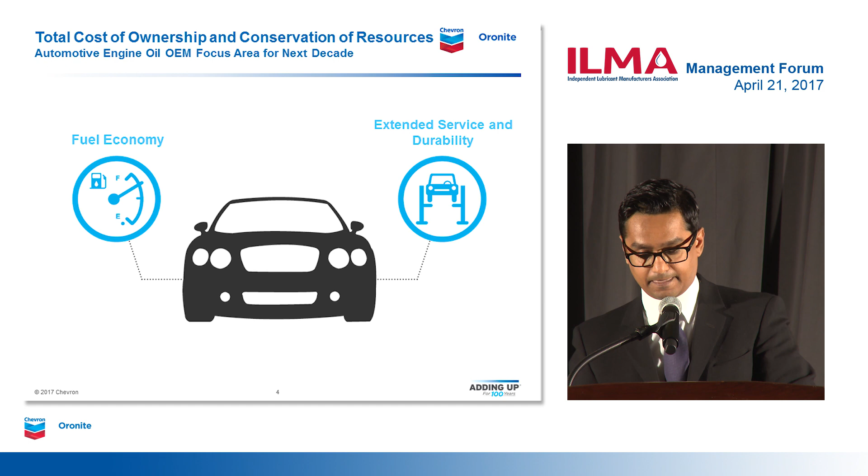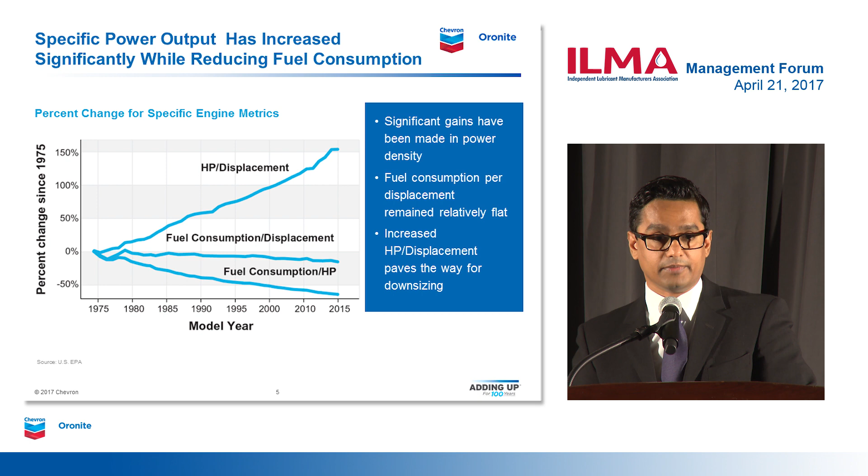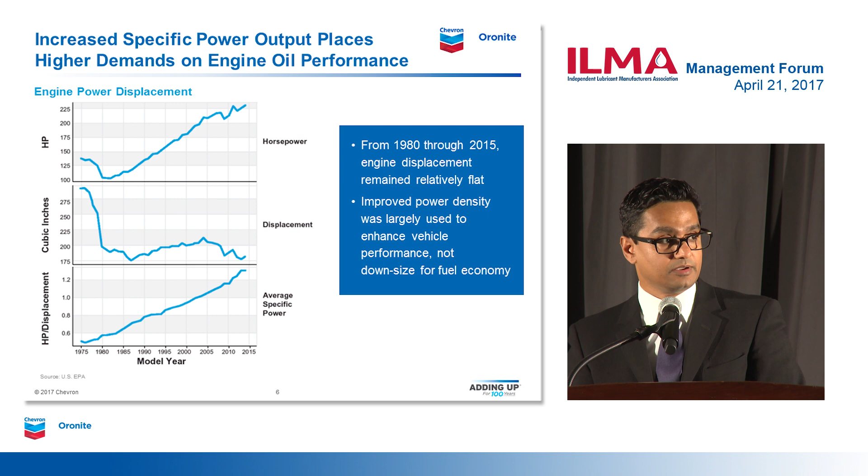There was a significant drop in average engine displacement in the late 1970s through the early 1980s, as we moved away from the market dominated by large V8 engines. This was a big step towards downsizing, but then the trend stopped for the next 35 years. Even with advances in power density since 1980, engine displacement remained largely flat through almost 2015, and actually increased some during the mid-2000s. Gains in power per displacement were largely targeted at improving vehicle performance, not necessarily fuel economy. That's not to say OEMs were at fault, but they were simply meeting the demands of the marketplace. Today, vehicle manufacturers are starting to leverage the gains in power density by downsizing engines to specifically improve fuel economy.

Fuel taxes are relatively low in the US, which does not encourage consumers to buy more fuel-efficient vehicles. Corporate average fuel economy regulations are now aimed at forcing OEMs to produce more fuel-efficient vehicles, even though the natural market demand may not be there with relatively low prices for the current environment.

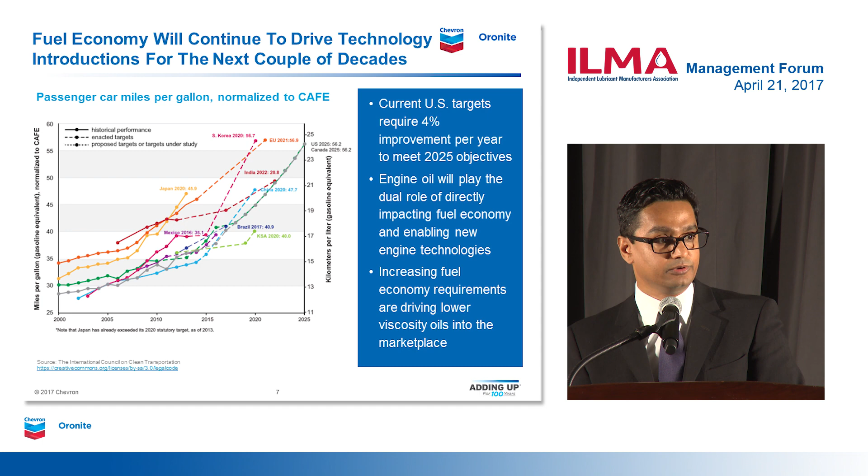So in order to meet these targets, which is 56.2 miles per gallon by 2025, the OEMs needed to improve corporate average fuel economy by 4% per year from now through 2025. The target gets progressively more difficult as the low-hanging fruit is captured and more sophisticated technologies and expensive equipment are adopted. However, I'm sure these numbers will be further reviewed with the current administration taking place.

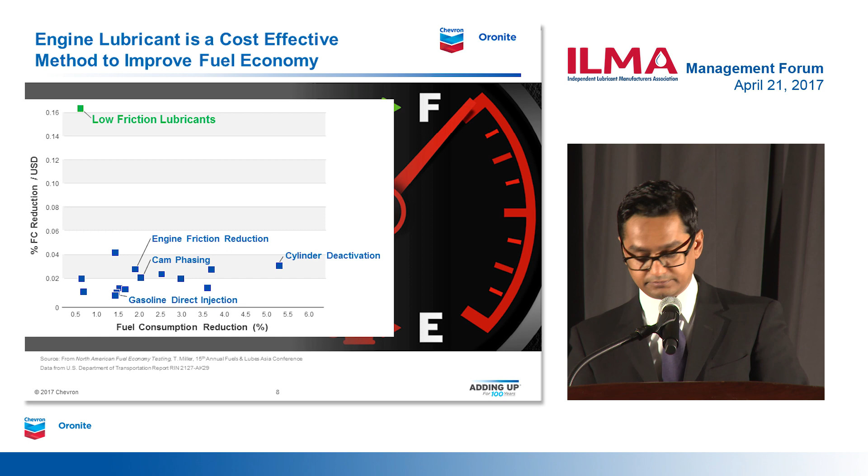So when you look at fuel economy, there are various ways in which fuel economy requirements drive new technologies into the marketplace. One of the first considerations is which conditions should be used to measure fuel economy, and are those conditions really representative of the market? So you have drive cycles, friction reduction, combustion optimization, downsizing, downspeeding. These are some of the examples.

Changes in what I'm calling the operating environment have an impact on the engine technology, which then has an impact on the oil formulations. Some of these relationships are not always obvious or even predicted. LSPI is an example which we'll be discussing a little bit.

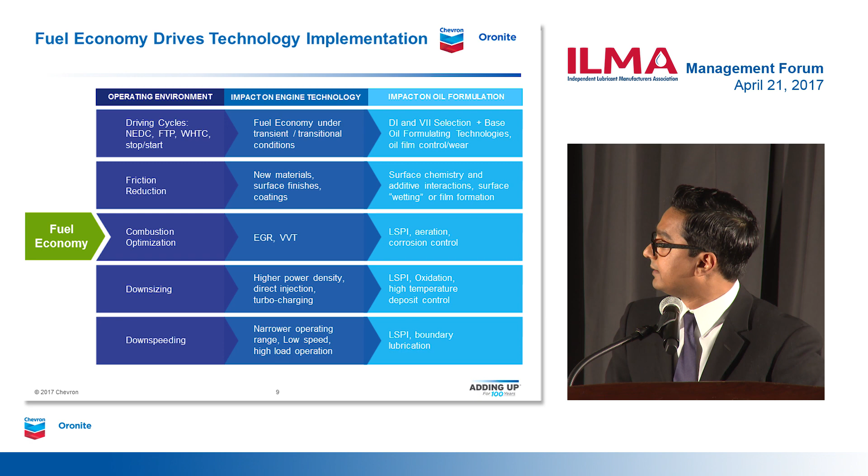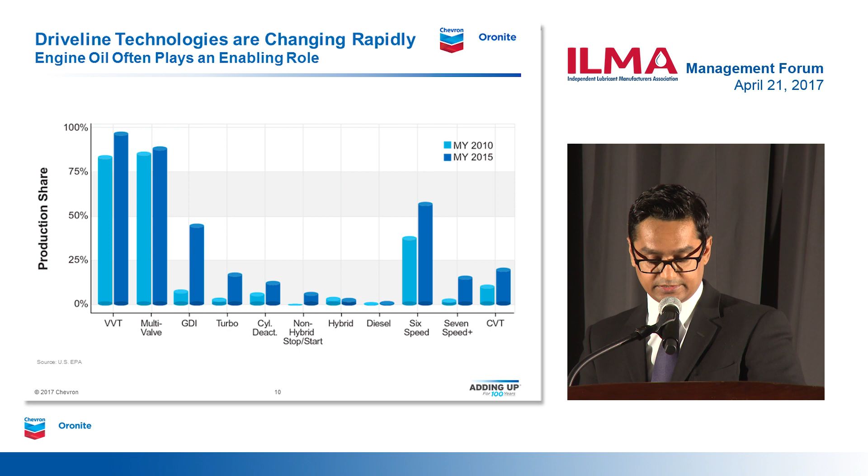Changes in the engine oil have been required to enable many of these technologies. Let's now take a closer look at some of them.

Specifically, in order to provide optimal fuel economy performance, many OEMs are offering turbocharged GDI engines coupled with 6, 7, 8, even 9-speed transmissions or even CVT. We see a rapid growth of products incorporating these technologies in the marketplace, and in order to enable some of these technologies, the passenger car motor oil must provide protection against LSPI, which is low-speed pre-ignition, oxidation deposits, soot or particulate matter, which we have never dealt with before on the gasoline side.

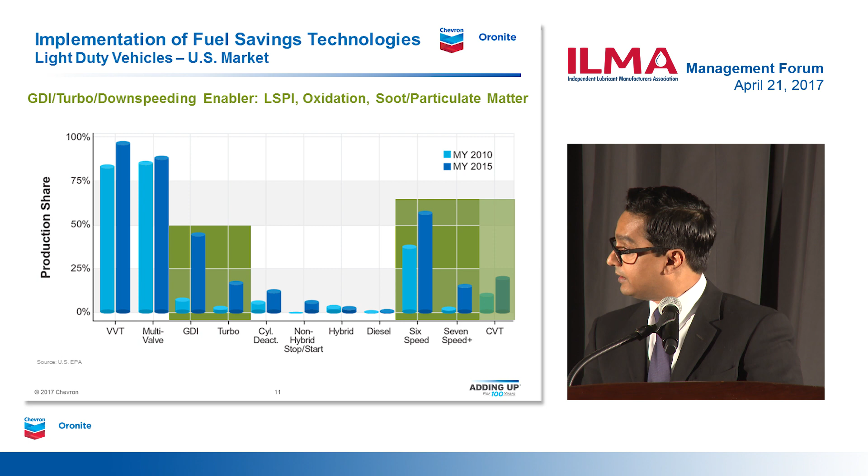So when you look at the combination of GDI and turbo, that allows the engine to generate high levels of power at relatively slow operating speeds. A relatively new phenomenon was discovered when operating turbo GDI engines under these conditions, which is low-speed pre-ignition or LSPI. And that certainly has some catastrophic impacts if not treated appropriately.

There has been a fair amount of work recently on LSPI, and there are various theories out there regarding the mechanism. In many of the studies, the engine oil composition has been having an impact on LSPI, and an LSPI test is being developed as part of the next categories, including GF-6 and Dexos, to address some of these. In addition, many OEMs around the world are developing their own LSPI test, which is now becoming more of a global phenomenon as this technology penetrates the marketplace.

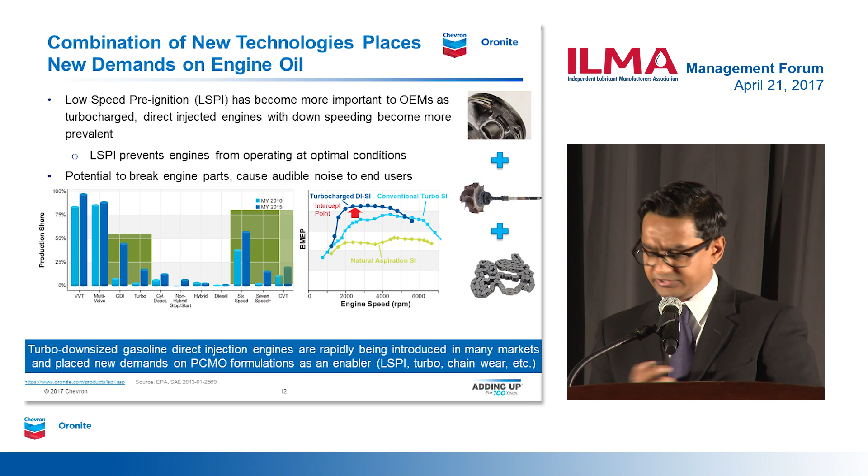So let's take a deeper look into the technical aspects of what LSPI is. LSPI results in the formation of a new flame front due to an unknown initiator that leads to knocking, which, as we all know from a traditional knocking perspective, is not good for the engine.

Besides making an audible noise detectable by vehicle operators, which will not make them pass through the NVH testing, LSPI can result in pressure spikes up to 130 bar. Passenger car gasoline engines are not designed, the metallurgy is not designed to operate at those pressures.

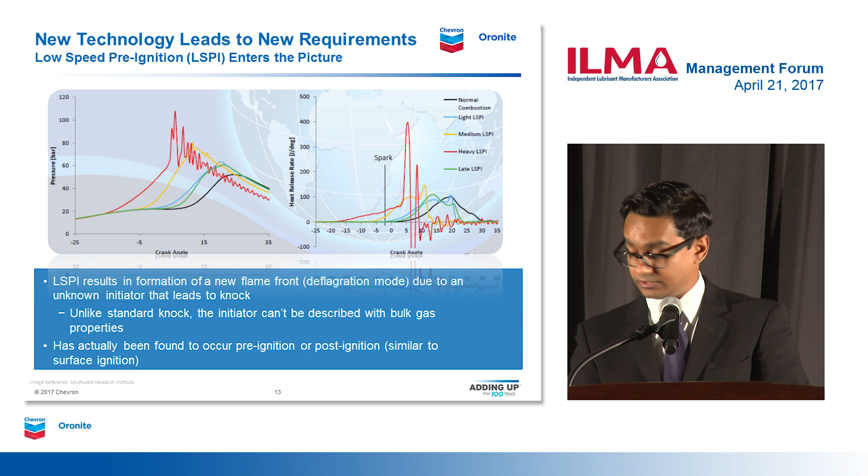Engines will be damaged if we hit them with such high peak pressures. What you saw in the previous slide is an image or illustration of a broken piston.

So as OEMs make those developments, we are evaluating these aspects of LSPI to fully understand the impact of fuels, impact of lubricants, impact of operating conditions, trying to make sure that we can take care of this challenge or performance.

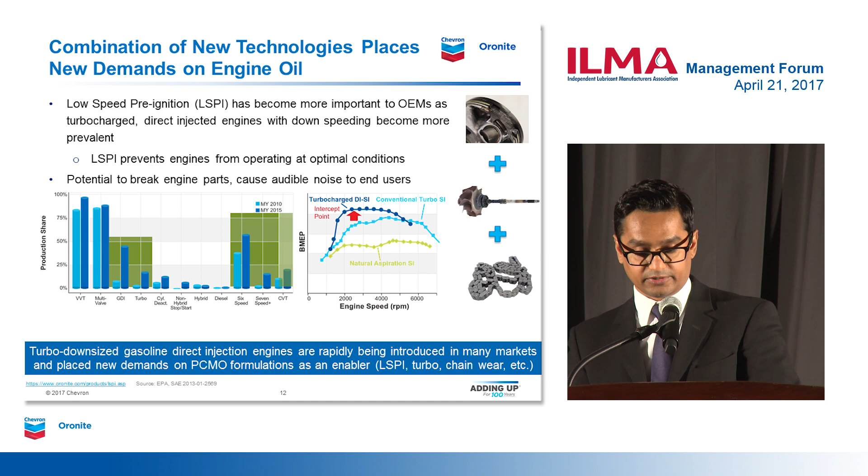As mentioned, various studies have taken place to investigate the impact of fuel, lubricant, hardware, etc. on LSPI. But there are specifically certain lubricant components, as we have heard from multiple literature sources and work that has been done, that are known to promote LSPI, while others can neutralize or actually suppress LSPI.

However, many of these compounds are included in engine oil formulations and have been used to deliver the traditional performance of fuel economy, cleanliness, and durability. They cannot simply be removed without affecting other areas of performance. So in order to formulate the future engine oil technologies while addressing LSPI, a rebalance of the chemistries of the compounds is needed to provide the needed performance in all areas and not just LSPI.

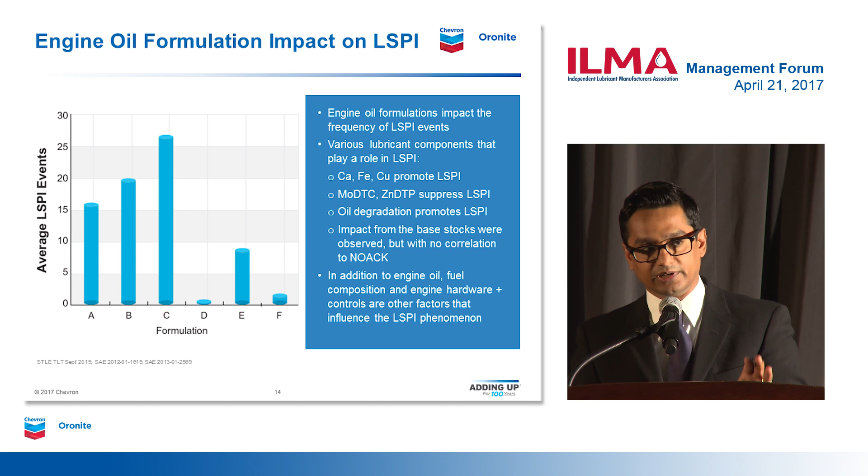So as I said, this is not a regional phenomenon. It started and was led by the American OEMs, mainly General Motors and Ford Motor Company, but now we are seeing the penetration of this technology around the globe.

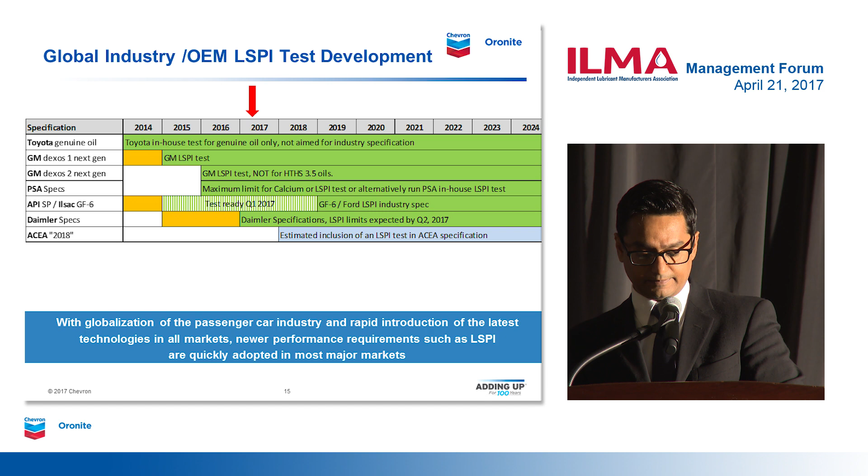Another relatively new phenomenon we are seeing with direct injection is that passenger car engine oils now need to deal with soot or particulate matter, which was probably the first time we're dealing with this. Soot or particulate matter in the oil has historically been limited to diesel engines, which also inject fuel directly into the combustion chamber. As a result of GDI, passenger car oils now must be able to provide wear control with the soot or particulate matter in the oil.

As a part of the ILSAC GF-6 category, Ford is developing a timing chain wear test with the industry using a 2.0-liter turbocharged GDI engine. The test uses silent chain material and will measure percent chain or timing chain stretch, which is a function of wear between the link pin and the plate.

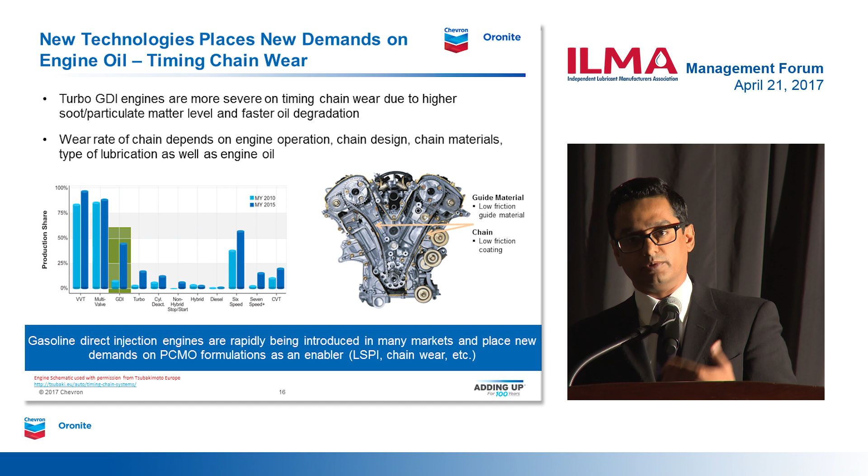There's been a lot of work done in the past 5 years, a lot of in-house work done by multiple OEMs and multiple folks in the industry. But traditionally, a chain wear test has responded to the materials and the metallurgy. In this case, it's the first time we're trying to bring in a chain wear test through an engine to measure oil performance.

So with this in mind, with the trends and the drivers and the hardware that is in the marketplace, how do we address it? How do we bring it to this industry? How do we develop a specification and then cater to the performance needs? So specifically for today, we'll focus on GF-6 and Dexos because those are the two big volume and the key specifications that are hitting the marketplace pretty soon.

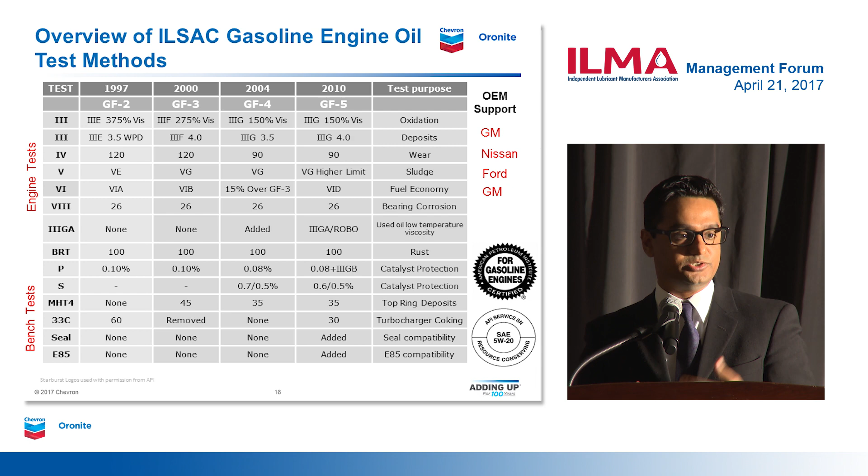So before we look into GF-6 or Dexos Gen 2, let's step back, because it's always nice to sometimes step back and look at how the industry has come together to develop and cater to these new technologies over the period of time. What you see here is a snapshot of the key developments, the key tests, all the way from GF-2 to GF-5.

All specifications are regularly upgraded to reflect the latest engine hardware and their needs. Each new specification has either new tests or replacement tests. The specifications are not licensable or credible without the standardized and monitored tests. The starburst and donuts that you see on the right-hand side bottom are API license symbols to help consumers identify the correct oil to use in their vehicles.

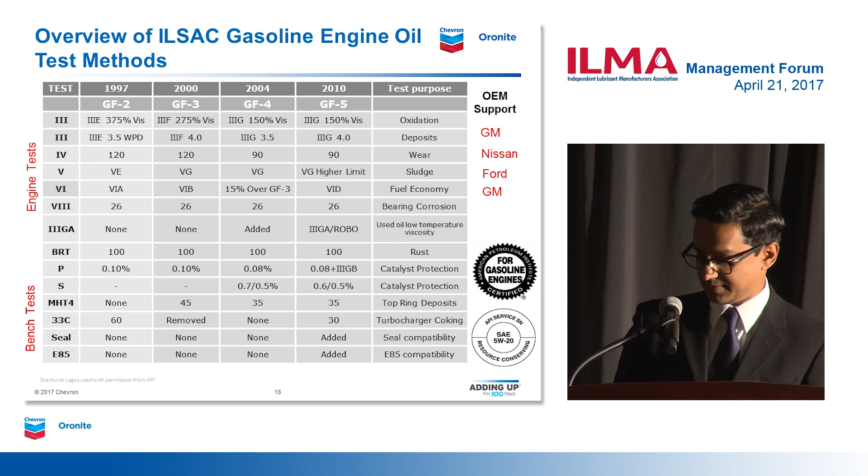The specification covers concerns raised by OEMs, including those listed in the slide. There's a lot of things that happen in these couple of lines that I just said. There's a lot of industry bodies, a lot of partnership that happens coming together to develop a spec that would take care of the OEM's needs or the hardware needs. So going forward, can we use the same infrastructure to address the next set of challenges, which is coming up with GF-6?

So what to expect? Fuel economy and oil robustness are always the key drivers, either directly or indirectly. So in this case, fuel economy will be the key driver for moving to GF-6.

Measured fuel economy benefit will be through the updates to the new tests, Sequence 6E and Sequence 6F, which will include fresh and used oil requirements. GF-6 oils will also have an indirect impact on fuel economy by minimizing LSPI, allowing for an indirect fuel economy benefit through the introduction of the GF-6 technology.

At the same time, durability by providing some form of LSPI mitigation will be the primary defining characteristic of GF-6. So it's kind of the gateway to GF-6. And after you are in there, it's basically the traditional performance: oil robustness, cleanliness, hardware protection, and sludge performance.

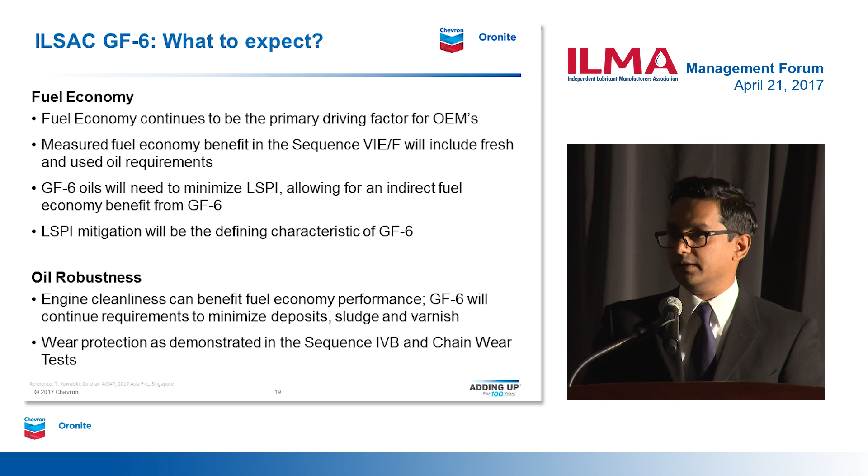Another additional component being introduced as part of GF-6 is the formal introduction of GF-6B, which is going to take care of a 0W-16 viscosity grade.

So here's a quick snapshot of the high-level qualitative comparison of GF-5 performance to GF-6. What you see on the slide is a quick illustration of the GF-5 performance. And when I look at GF-6, what I want to illustrate here is that probably in the history of passenger car motor oil development, the amount of work going on in bringing GF-6 online is tremendous.

If you look at the blue performance parameters, which are the traditional performance parameters getting updated by hardware, whether it's fuel economy, engine sludge protection, cam wear protection, or piston cleanliness and oxidation control, every single test is getting upgraded with new hardware, either from the same OEM or a different OEM.

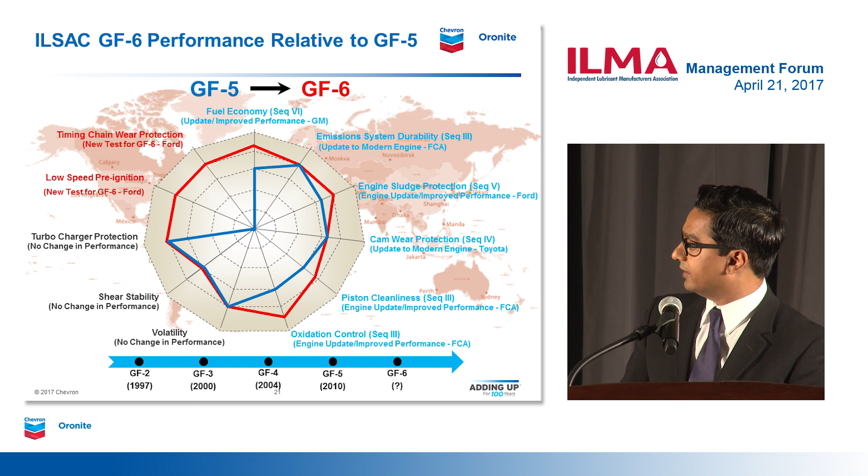And plus, what you see here is the global nature, the global footprint with requirements not only in the Americas, but now there is an emerging requirement at the same time in Asia, which is adopting these GF-6 categories and implementing them at the same time as in the Americas. So there is a lot of challenge in front of us that the industry is coming together to develop.

So where are we? What is the road to GF-6? Here we are today: engine test development. I'm sure you have read a lot of articles, a lot of literature, and been exposed to a lot of dates from an API first license date standpoint.

And I always get this even within my own management, they ask, when is GF-6? As a matter of fact, last year, we collectively as a team in AOAP decided not to throw out a first license date, because unless we complete and get some ground running on the engine test development, it doesn't make sense for us to project something, because it gives a false notion of the delays.

I think what people need to understand is the amount of work that is going on in bringing some of these categories online. So engine test development is where we stand.

This is probably the simplest picture of a GF-6 development, and I'll show you the more complicated one next. After we come to an end of engine test development, the light is probably coming, we can see the light at the end of the tunnel. But even after that, there's a lot more work that needs to be done.

BOI VGRA is another big piece of it, because when you bring in 7 new tests, you bring in a lot of BOI VGRA development work. I know some of our folks here are pretty involved in some of this development, and this will take a lot of time to bring and develop the BOI VGRA rules as we develop the products.

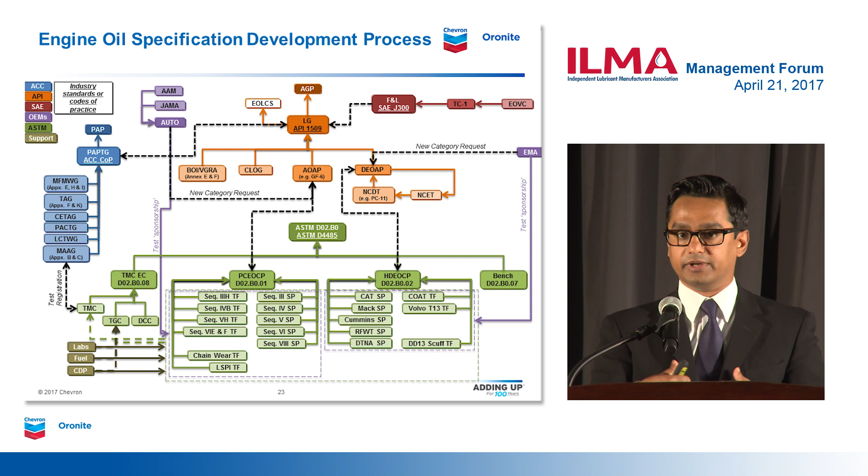Let's look at how the Americas market is breaking up. The Americas market is now breaking up into Dexos. Dexos is now into generation 2. When we were in generation 1 and GF-5, they kind of overlapped at the same time. In case of generation 2 and GF-6, now there is a gap. So now generation 2 is right in front of us, but GF-6 is a couple of years from now.

So if you look at the main markets for GM today, it's Americas, it's Brazil, it's South Korea, it's China. So the implementation is not lagging. The implementation is a global implementation.

So the expectations to launch some of these products are at the same time, and the changes are at the same time. So with that, a quick reminder, Dexos 1 first generation licenses are scheduled to expire on August 31st, 2017, which is right in a couple of months. And I'm sure there's a lot of dialogue that is going on in the industry in how to address that and how the products need to be updated.

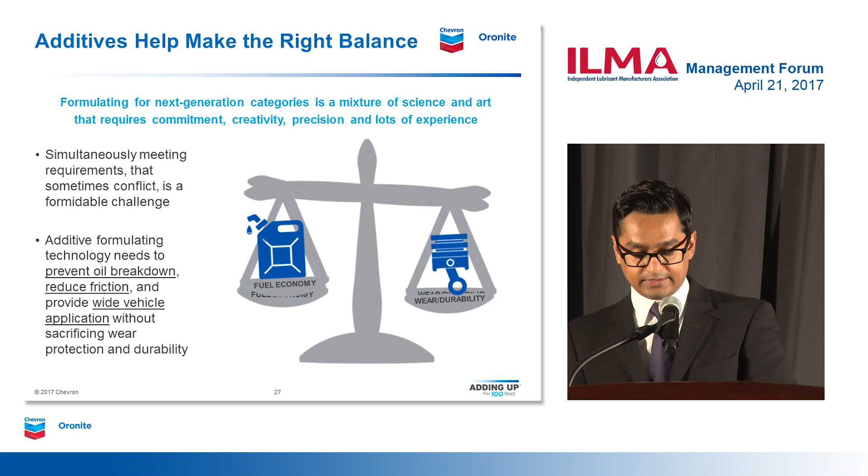The formulating technologies need to prevent oil breakdown, reduce friction, universal oil capability without sacrificing wear protection and durability, simultaneously meeting some of the future challenges and being able to connect to those.

So we have all done puzzles. My 4-year-old gets better at solving puzzles as she grows up. But I think the biggest challenge for us is taking care of these smaller systems and then fitting them into the bigger puzzle. And that's a big piece of it.

So when I say a smaller system, right now, the system that is in front of us is turbocharged GDI engine. And the performance areas that we have to address are turbo protection, low-speed pre-ignition, and chain wear, to name a few. However, when we solve this puzzle, it has to fit into the traditional puzzle, which takes care of the fuel economy, which takes care of the wear, which takes care of the sludge.

And then we also have to be ready for the future, because sometimes we want that flexibility on the platform. So how are we doing that?

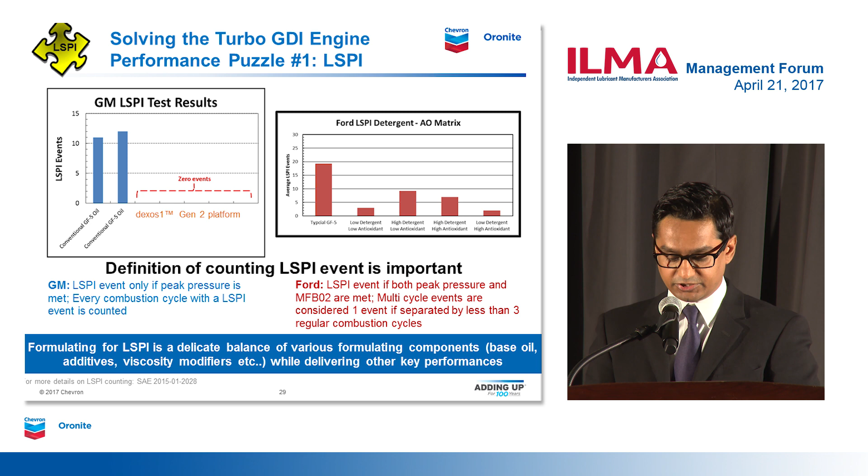But sometimes from a simplistic view or to reduce complexity, we want to minimize and understand the fundamentals. So what you see here, on the left-hand side, is a GM LSPI test.

If you put a conventional GF-5 oil, you see high LSPI events, which is not acceptable. When you look at a Dexos 1 Gen 2 type platform, this is the requirement. You have to meet the GM Dexos 1 Gen 2 limits, which requires you to have at least 3 zeros in the test, and also a maximum peak pressure of 2 events, not more than that.

However, what we are trying to illustrate here is as we move into the Ford engine, these same oils could actually behave a little bit differently. Here is a small snapshot of a matrix of a detergent and an antioxidant just to show what are the drivers for us to formulate around.

But the key part to these 2 tests is the definition of the counting of LSPI events, which is extremely important, because when we develop a specification after the technology, it is extremely important to know how the limits will be drawn. And so when you're looking at a GM test, you might see all zeros, and you might see some events here, but that doesn't mean that they are looking at the same thing.

In case of GM LSPI events, the way they are counting some of these events is very different. They're looking at peak pressure. When you're looking at Ford LSPI, they're looking at peak pressure, the mass fraction burn, just everything. So it is important that the absolute numbers may not match, but the performance of the oil is very similar.

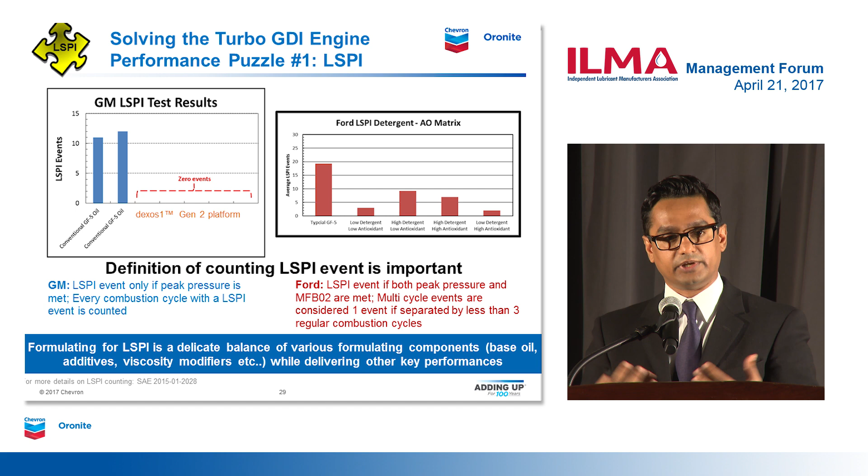So those are the things that the OEMs need to understand, that the industry cannot develop single products for every single engine or LSPI test. It has to fit in. So we wrote a paper just to explain that process of how we need to understand the mechanism of counting as we go into the limit setting process.

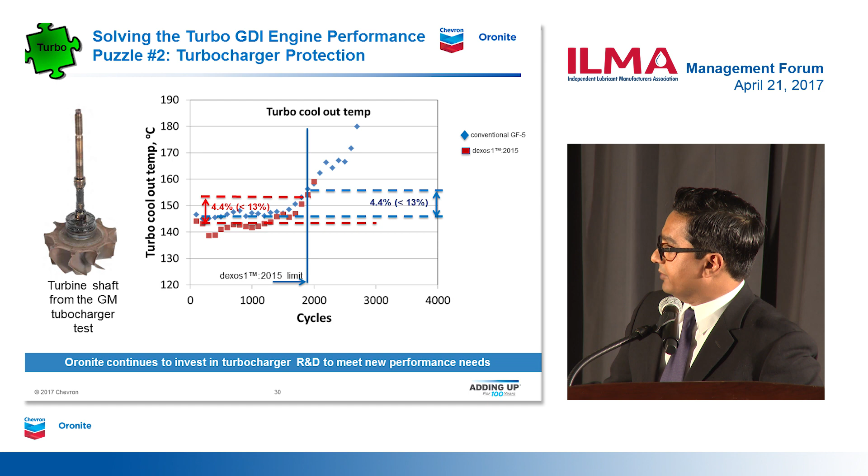So eventually, what this test is looking at is the antioxidancy performance or the oxidation strength of the oil. So you have to take care of the LSPI and make sure once you've reformulated the product to address LSPI, you can deliver the antioxidancy performance to take care of turbocharger protection. And these are the limits: less than 13% for the Dexos 1 Gen 2 approval.

And there's been a lot of work, as I said, done in this area. There's a lot of papers around understanding the soot size, the differences in the soot particles between diesel and gasoline. Traditionally, this test has always responded to metallurgy differences. You put a coating here, you can drop the numbers. There hasn't been a test where it can statistically separate oils, and this probably would be the first one.

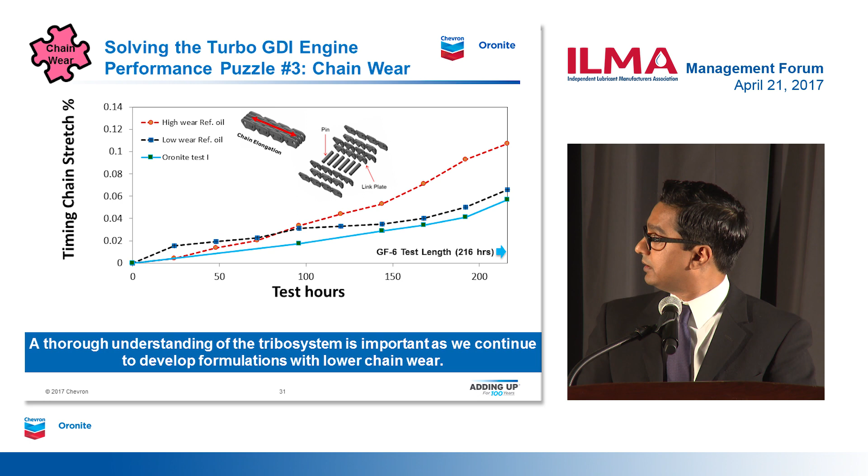So to sum it up, how are we going to deliver this performance? As I said, the traditional areas is enabling fuel economy directly, indirectly through viscosity changes, through additives, friction modifiers, low friction lubricants, enabling hardware indirectly like LSPI. But after that, it comes down to engine protection, delivering engine cleanliness and durability.

However, after performance, we got to make sure we address the supply chain aspect of it. We have to make sure the product is available globally. And I guess a lot of folks are interested, at the end of the day, it has to be cost effective. It has to meet the market economics, right? So that's another piece of the puzzle we'll have to address. Plus, as I said, products are becoming more global, and that needs to be addressed. So the complexity is not just limited to the technical development, it also is part of how to bring a product to the marketplace. So technical products and the marketplace is extremely important to keep in mind as you take a holistic view of the development process.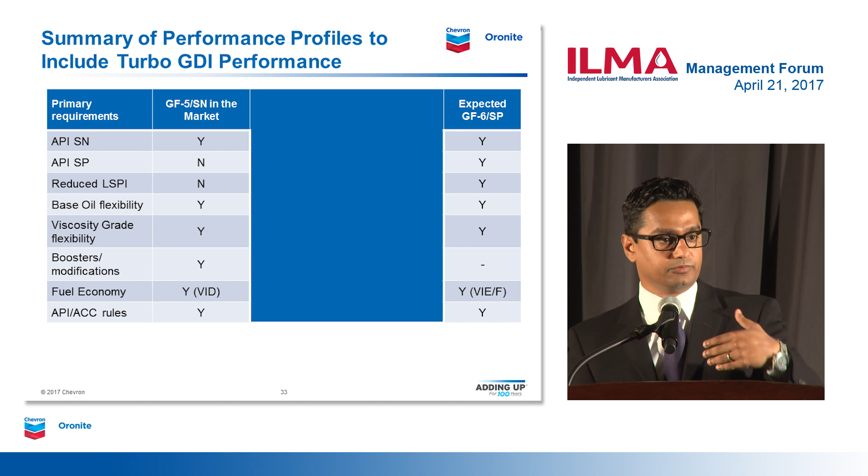So here's some performance profiles, just to give you a summary of the performance profiles of products that we probably need to think of as we address the turbo GDI performance. So here we are with GF-5. I've just listed out the key performance areas. We're all familiar with it. This is what the expected GF-6 and these are conventional products.

But again, how do we jump there? We're not yet here, we're getting there. Dexos 1 came in, so we are addressing LSPI capability there, reduced LSPI. As you have seen, GM Dexos is very limited in terms of the flexibility on BOI VGRA. So there is a limited set of products in the marketplace. There is a lot of work that is going on with GM and the industry to bring products.

There's a limited viscosity profile that they're looking for because a lot of these engines are looking at 530, 020. There is a 520, and there is a little bit of 030, and they've also introduced 016, although they have explicitly said in a lot of their presentations that none of their engines right now uses 016. But again, I think the concept that they use is future-proofing the specification if there is a need in the future.

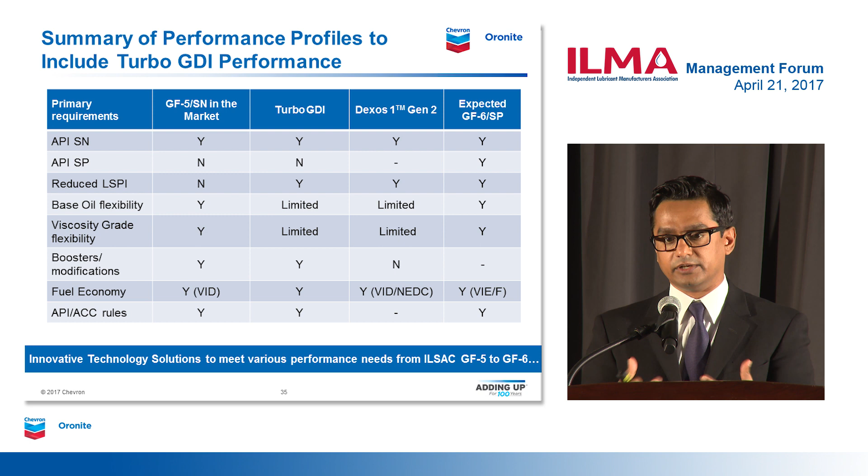And then, as I said, a turbo GDI. I mean, Dexos is for GM, but when you look at the gamut of turbo GDI engines, not just in the Americas, but globally, there is a lot of engines coming out in the marketplace with turbo GDI technology. And there is an increasing need for a product that could be developed to meet the turbo GDI platform. And we see that market here, and that's why we provided a quick snapshot of what that product profile could look like.

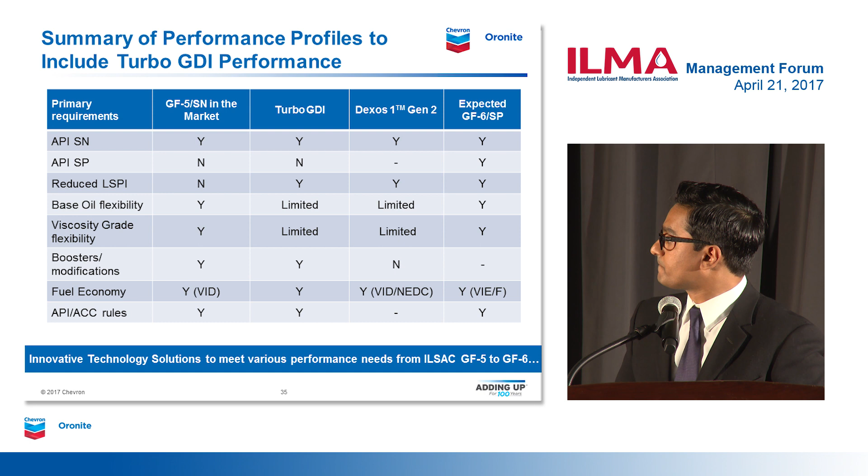And finally, you always have to stay connected to the real-world feedback. Nothing is perfect unless we hear it from the field. So traditionally, like all of us in the industry, we throw products in the field. In this case, it's a quick snapshot of some data set of oils that have been thrown in Vegas with turbo GDI engines. Two specific oils: one is the conventional GF-5, and another one is turbo GDI product platform.

Just to understand, is there any performance difference compared to the GF-5 from a no-harm perspective? And what we're looking for in this no-harm situation is to make sure that with all of these chemistry changes we're making, is it in line with the GF-5 technology, is it better, or is it worse, to help feed that information as we develop the products. So here's a quick snapshot of the viscosity, TAN, TBN performance, comparing the GF-5 technologies to this turbo GDI platform. And pretty much, from a field performance standpoint, it's very similar, overlapping the GF-5 technology. So it gives a lot of satisfaction for us to understand that all the modifications we have made address or meet the field requirements that are traditionally put in place.

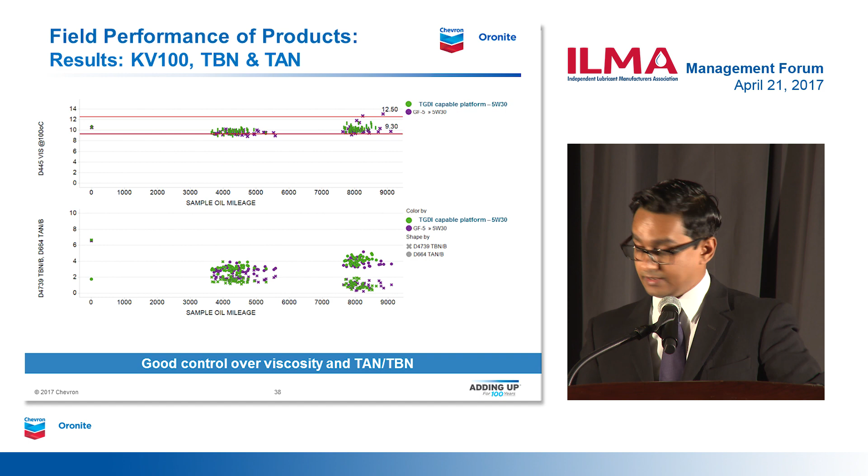Looking at nitration and oxidation and metals, again, very similar performance compared to GF-5. So protection-wise, there is that same protection that we are providing just from a bare used oil analysis. However, this is a very small snapshot.

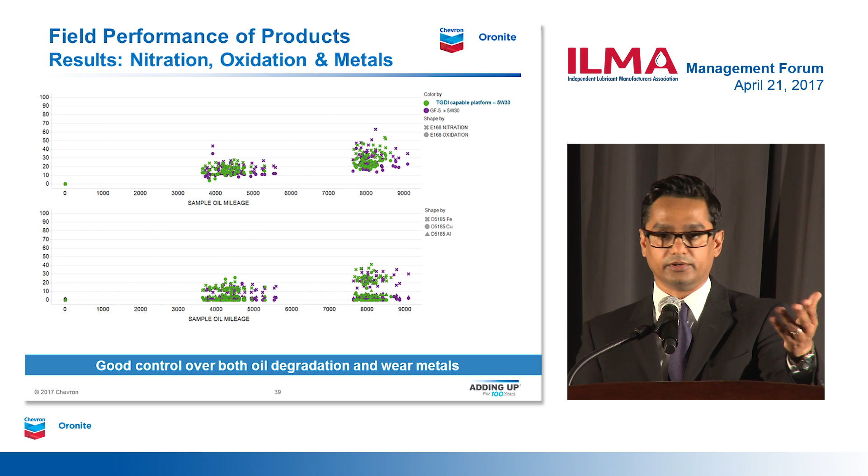There's a lot of work the industry is doing along with ourselves in trying to understand what these engines look like, the parts look like, and trying to fine-tune the technologies as we progress into GF-6 and the next generation of oils. The other key part that we do is get real-time feedback to help industry folks, and from an education standpoint, get a sense check of what the market is looking for, what consumers and installers are looking at from some of these specifications.

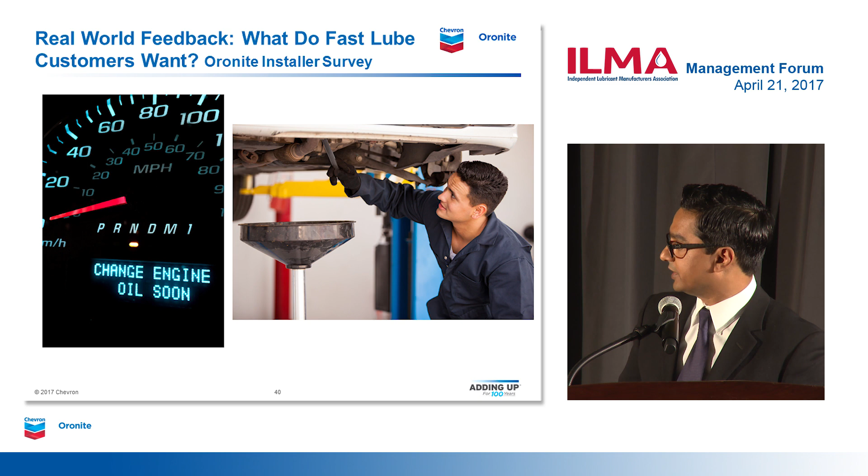There is a series of questions, just to give you a quick snapshot. In this particular case, what we're asking is which engine oil performance areas are most important to your customers today, and then feed that into our system to develop those technologies. If you look at it, here is a quick data point, going back to 2015 until recently: extended drain, wear, improved engine durability, fuel economy - nothing new. These are all the traditional performance areas we talk about.

So just making sure that the products that are developed are meeting some of these consumer or installer needs. Durability, long drain, and fuel economy are still the most important features.

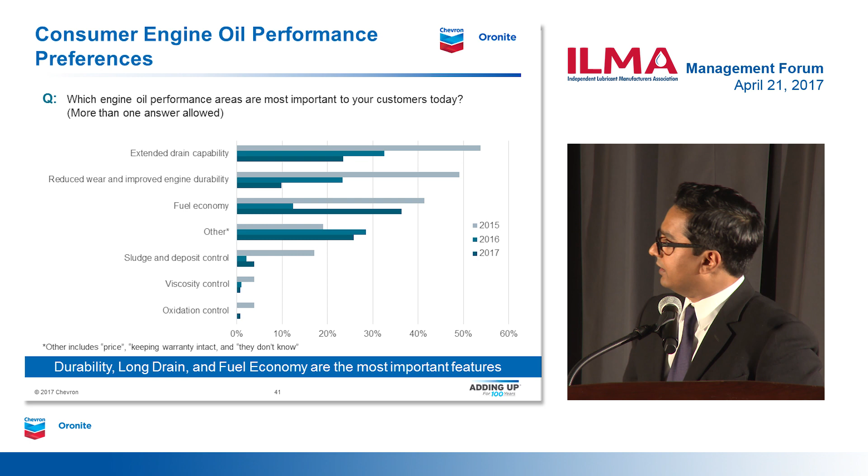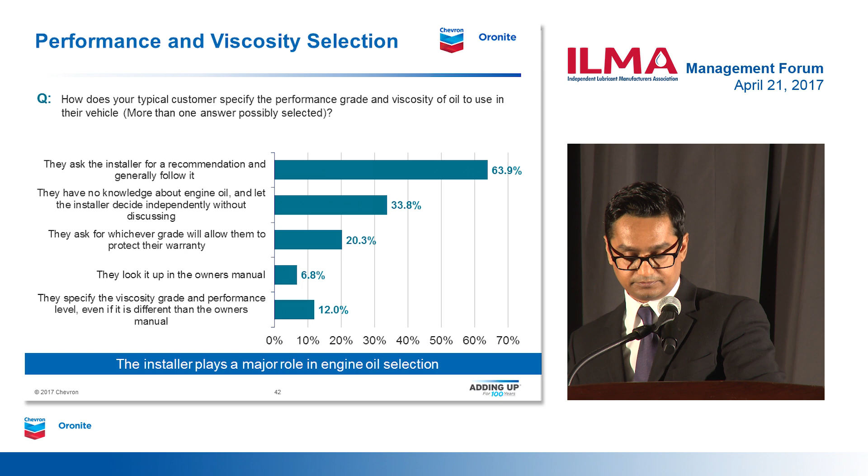So finally, to wrap up this section, I hope I was able to give you a holistic view of this entire process of how we look at the future, what is important, what are the drivers, how engine oil comes into that equation, how we look at technical development and bring it into a specification process, and then take that specification process, develop products that meet the market needs, and eventually deploy it in a sustainable format and make it as future-proof as possible, because the future is not that far.

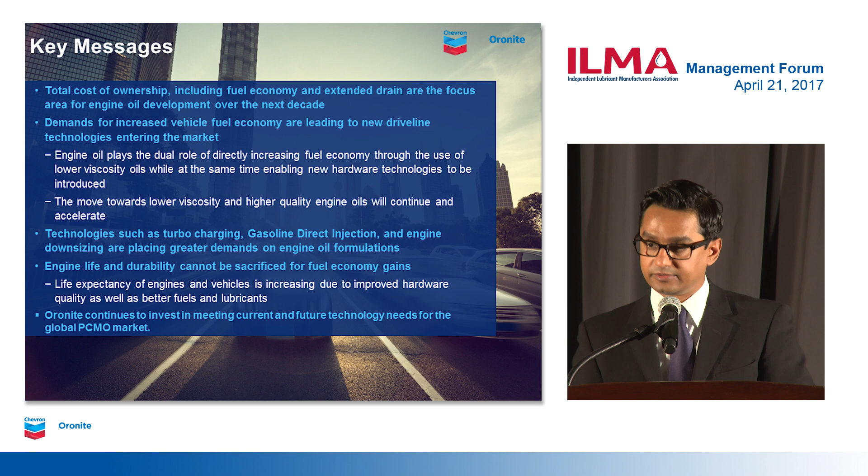Probably I've seen presentations where people have already started projecting GF-7. And I scratched my head and said, I'm here sitting in GF-6 and people are already thinking about - I'm not even thinking beyond engine test development completion and people are already projecting GF-7. But that's a reality. OEMs, once they're done with test development, are looking at the next set of hardware. So overall, as I said, we are continuously investing in meeting the current and future technology needs as our partners, as the industry is, to make sure consumers get the latest and best products in the marketplace to meet the global PCMO market.